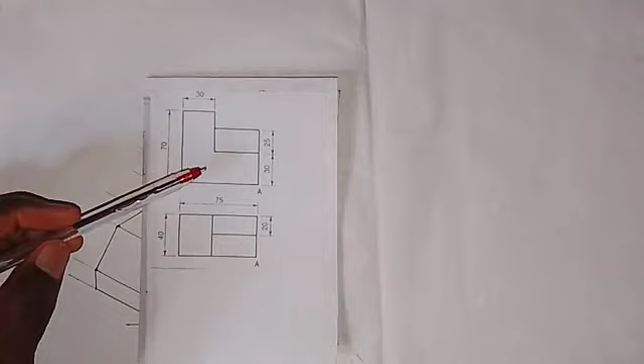Here we are going to be working on the conversion of these orthographic views into isometric view. As these views are given in first angle orthographic projection, we have this to be the front elevation and this is the plan. Now let's talk about the dimensions on each of them.

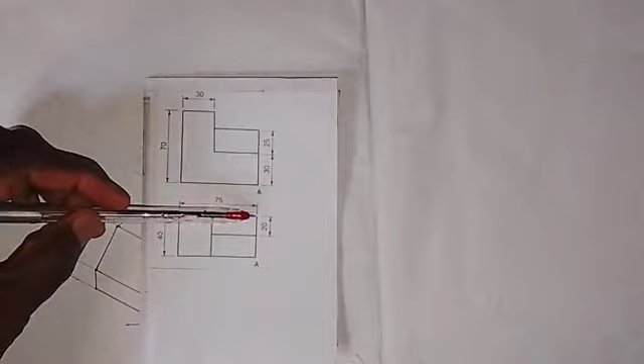For the front elevation, from here to here is 70, from here to here is 30, from here to here we also have it to be 30, from here to here is 25. In the plan we have that from here to here is 75, that is from here to here too, and from here to here is 40, from here to here is 20. The lowest point is here, indicated with letter A. We also have it here in the plan.

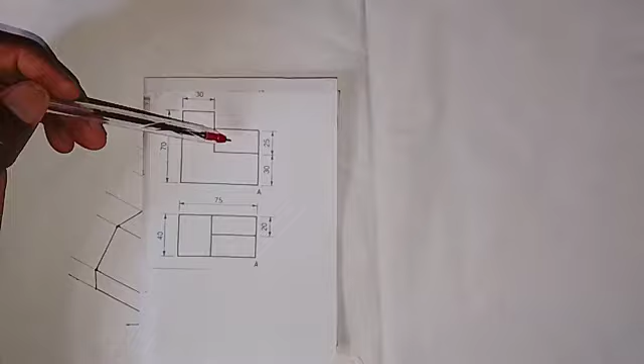So let's go and put this part together to produce the isometric view of this object. But what I'm going to do first is to produce the isometric view of the front elevation without this rectangle. Okay, so without this rectangle, I will tell you the reason why we are not going to draw this rectangle together with the front elevation that I want to produce now in isometric view.

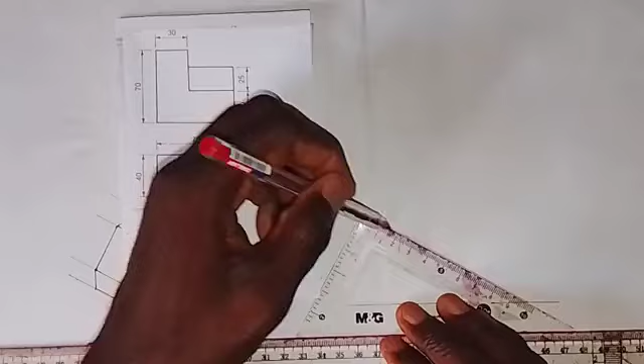So let's start. We are going to draw a short horizontal line here. So we have this as a short horizontal line. Then we take the 30 degrees set square, we set it in this direction, and we draw a line in this direction. Then I will come to this point and draw a short vertical line here like this. Okay, then we are going to indicate the lowest point. So this point is the lowest point. We have to write it there.

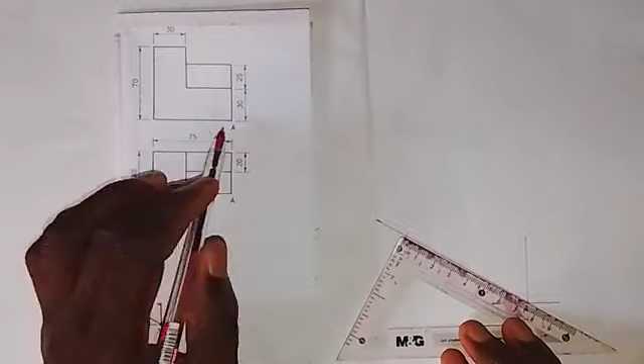All right, so then I'm going to take a measurement of 75 millimeters from this point to this side here, representing this line from here to here. And then I will take 30 millimeters, that is the distance from here to here. I'll take 30 millimeters up from this point. So this is 30 millimeters here. So I'll come to this point here and draw a vertical line from here up.

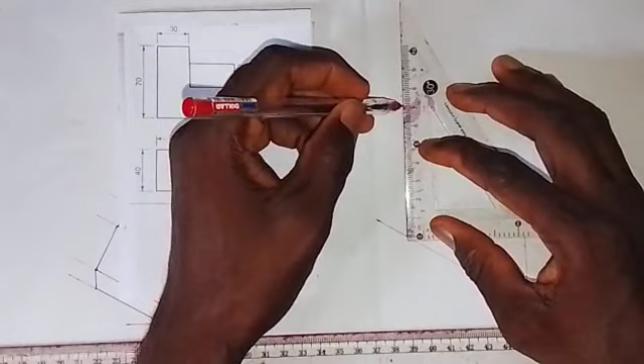Okay, so I will take a measurement of 70 millimeters, that is from here to here. So this is 70 millimeters here. So then I will come to this point here. I'm going to draw a line for this at an angle of 30 degrees. So coming to this point, I will draw the line like this. Okay, so we have this.

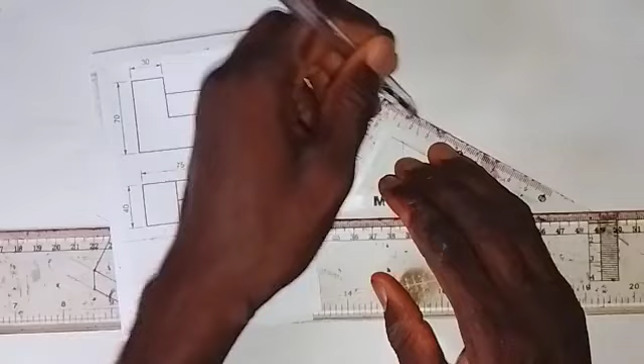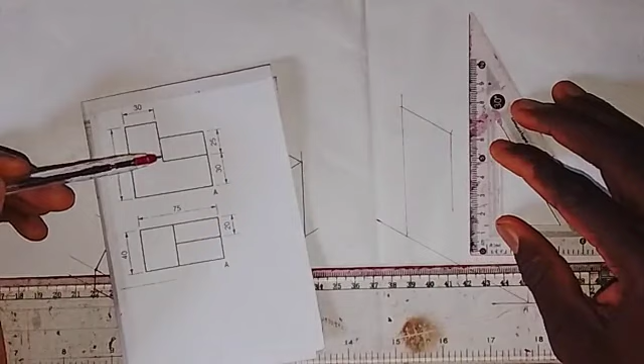Then I'll take a measurement of 30 millimeters. So this is 30 millimeters, and I'm going to draw a vertical line down from this point. Okay, so this is the vertical line here like this. So then what is the distance from here to here? If the distance from here to here is 30 and the total is 70, it means that from here to here is 40 millimeters.

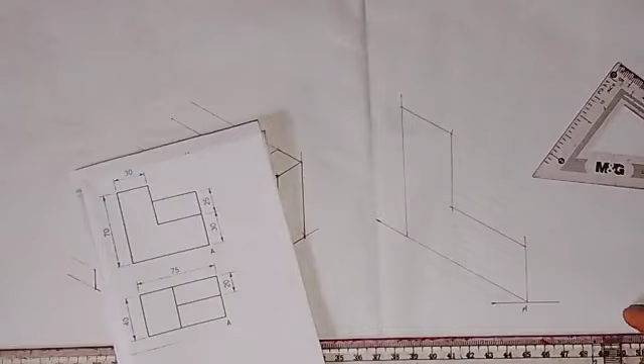So from this point I will take a measurement of 40 millimeters back. So this is 40 millimeters. Even if I don't take it, I can just come here where we have this 30 and draw a line from there and join it together with this. As you can see, they are joined together. All right, so if you look at what we have, this L shape that we have as the front elevation, we have produced this. Beside this, as I said, I'm going to explain what this one is or where it is placed.

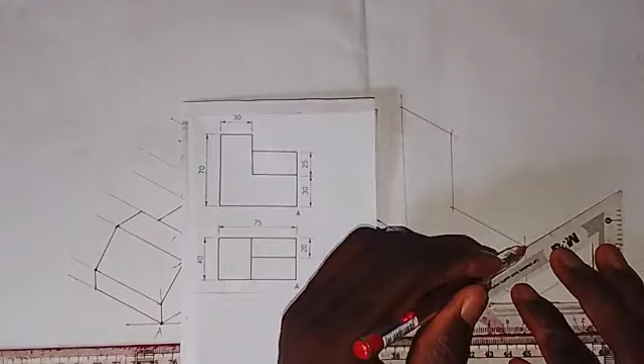Okay, now for us to make it an isometric block, we have to come to this point and draw a line in this direction. Then we come to this point here, we also draw a line in this direction, and then we come to this point. Coming to this point, we also draw a line in this direction. So we come to this point also, we draw a line in this direction, and then coming to this point here.

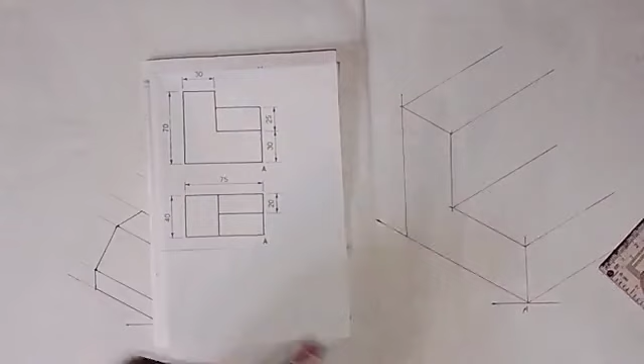Okay, coming to this point, we draw a line in this direction. All right, so having done that, the next thing that we are going to do is that we have that from here to here is 40. So let's take that 40. So here we take a measurement of 40 millimeters.

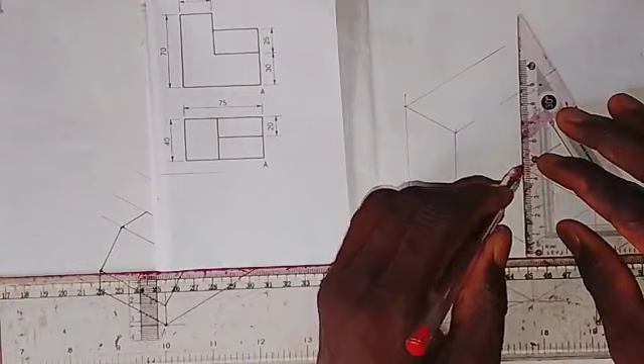This is 40 millimeters. So I will come here with my set square and draw a vertical line at this point. So draw a vertical line here, and then here I'll also draw a line. So with my set square being set like this, I draw a line in this direction, and from here we set it vertical, we draw a line in this direction, and then coming up here, we also draw a line from here in this direction. All right, so we have this now.

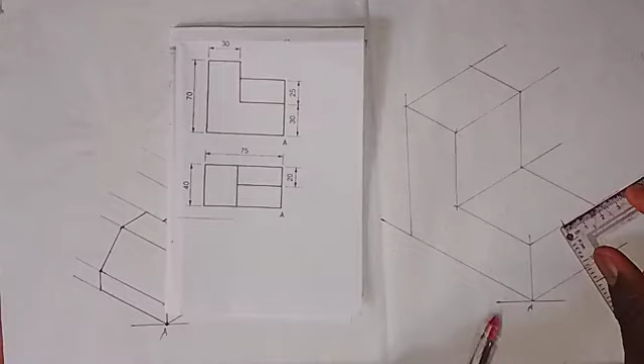So now what we are going to do is that this rectangle that we see here, this is its plan, and distance from here to here is 20 millimeters if you look at it. So then we need to come here and take a measurement of 20 millimeters forward. This is 20 millimeters. Okay, then at this point, I'm going to draw a vertical line. I'm going to extend this vertical line up like this, okay? Then I'll also draw this vertical line up like this, okay?

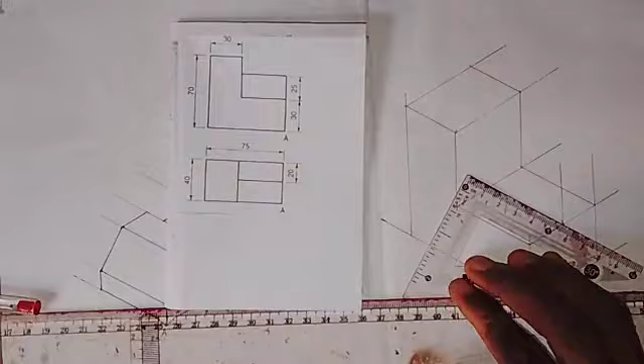And then I'm going to transfer this point. I will transfer it, okay? So I'll make it a thick line at once by drawing this line to touch this line here like this, okay? Then on this line, as we have that from here to here is 25, I will take 25 millimeters from this point up. So this is 25 millimeters.

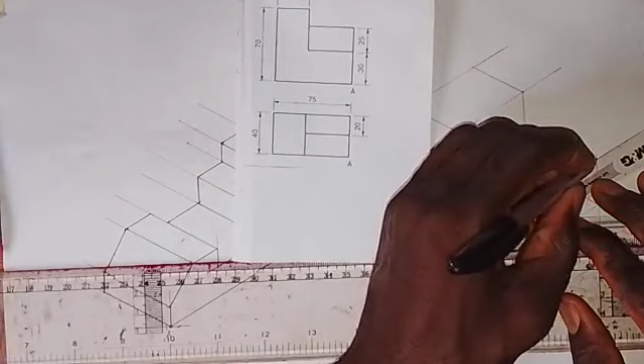So I'm going to join this point. I will join it together with this, making it a thick line at once. So I just make it a thick line from here to here. Then I'm going to transfer this line, okay? So I transfer it here like this. So I'll come to this point and draw a vertical line up like this, okay?

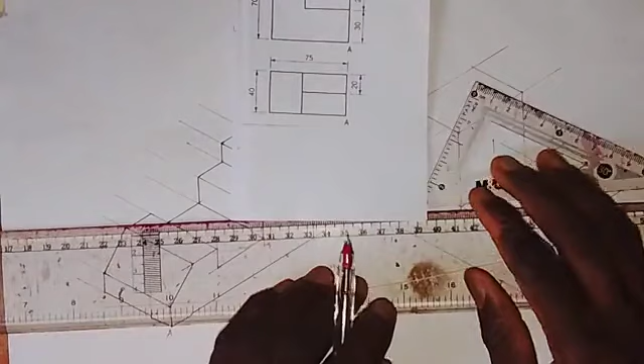So I need to make sure, okay, let me just come here and draw this line. So draw a line from this point like this, okay? Then I need to make sure these two lines touch each other. So I need to transfer this, okay? So they have met. Then I'm going to draw a line from here. So make it a thick line at once, so it goes like this, okay? So you can see what we have here.

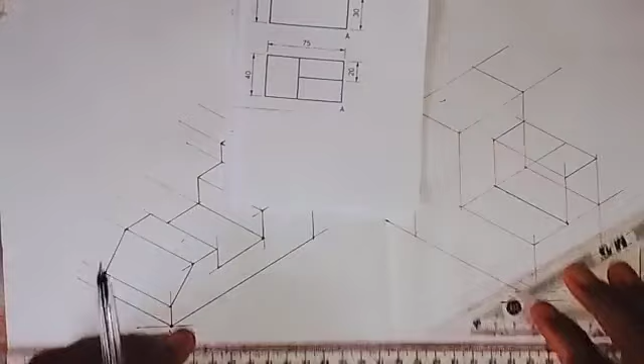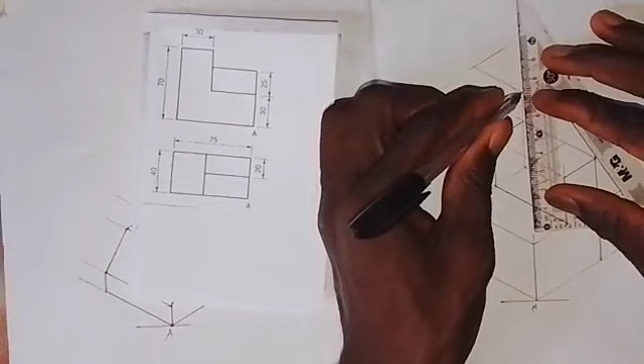So then we have to make this line a thick line. Let's make this also a thick line from here down, and also make this a thick line from here down to this point, okay? So also this line, I'll make it a thick line from here to here. So coming here, making this line a thick line, and I'll also make this a thick line from here down, to make it more visible.

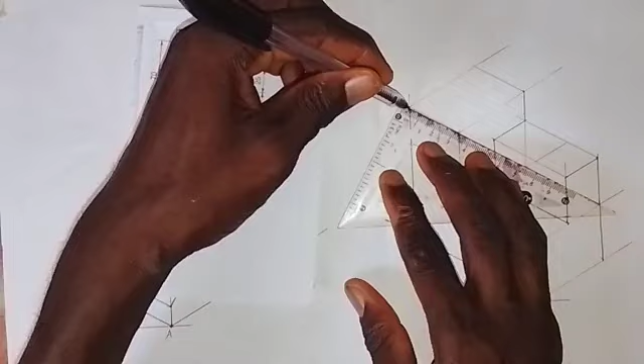And then on this side, I'll make this line a thick line like this, okay? Then this line also make it more visible from here to here. And this line, make it a thick line. All right, so coming in this direction, make this line a thick line from here to here, and this line from here to this point, make it a thick line, and also make this a thick line from here to here, and this line will also be made a thick line.

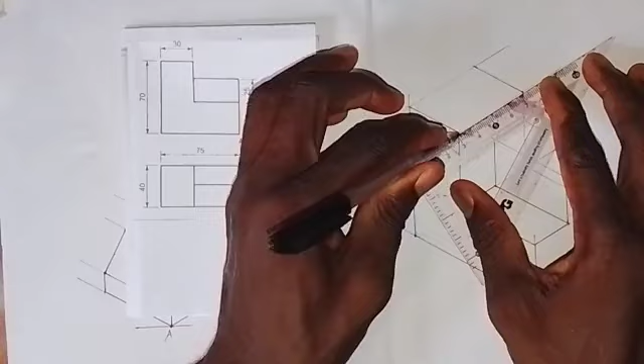And then lastly, this one, okay, that's not the last. I can see that these lines also need to be made thick lines from here to here, and this also should be made a thick line from here to here. All right, so here we have the isometric view of this object whose orthographic views are given here. It's as simple as I've done it here.